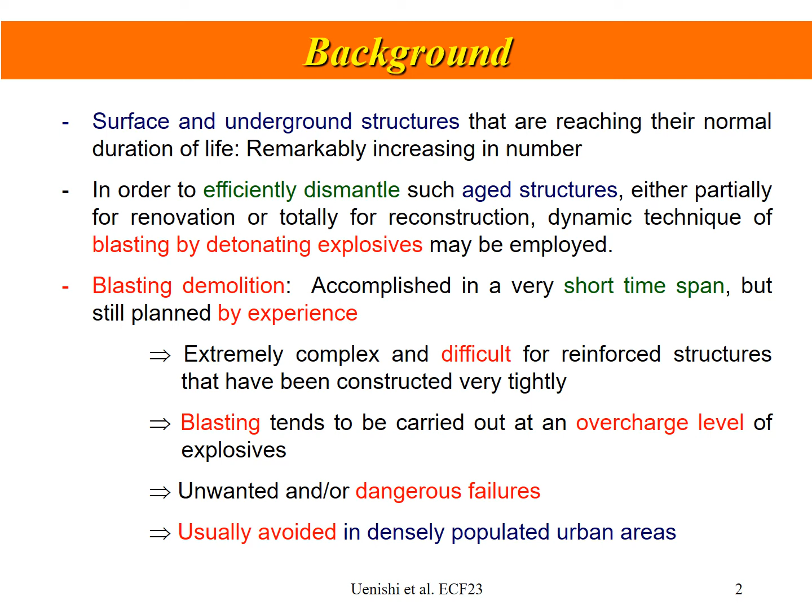Therefore, in place of explosives, by using safer and more controllable electric energy, and based on the theory of wave and fracture dynamics, we have been investigating a more reliable technique for precisely controlled dynamic disintegration of structures with and without reinforcements. So far, by applying electric discharge impulses, EDI, we have successfully disintegrated rectangular and cylindrical concrete specimens as desired.

We have found that specific combinations of blast holes, empty dummy holes, as well as free surfaces and pre-existing planes of weakness can really govern the dynamic behavior of the waves and the main crack, and thus the disintegration pattern in given structures.

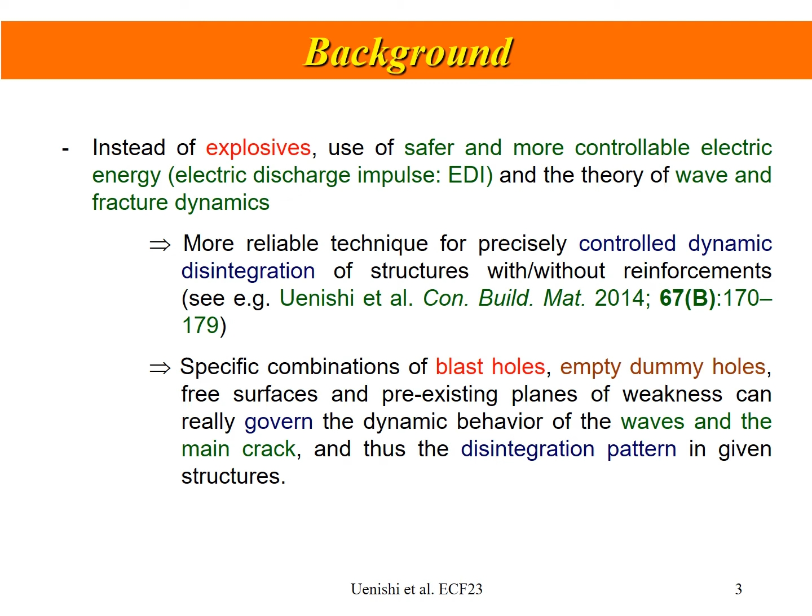Here, among others, we are going to talk about the following 4 selected examples of dynamic fracture due to EDI-induced waves. First, fundamental fracture development in a concrete column will be introduced. Then the effects of empty dummy holes, slits, and structural inhomogeneities on dynamic fracture will be briefly mentioned.

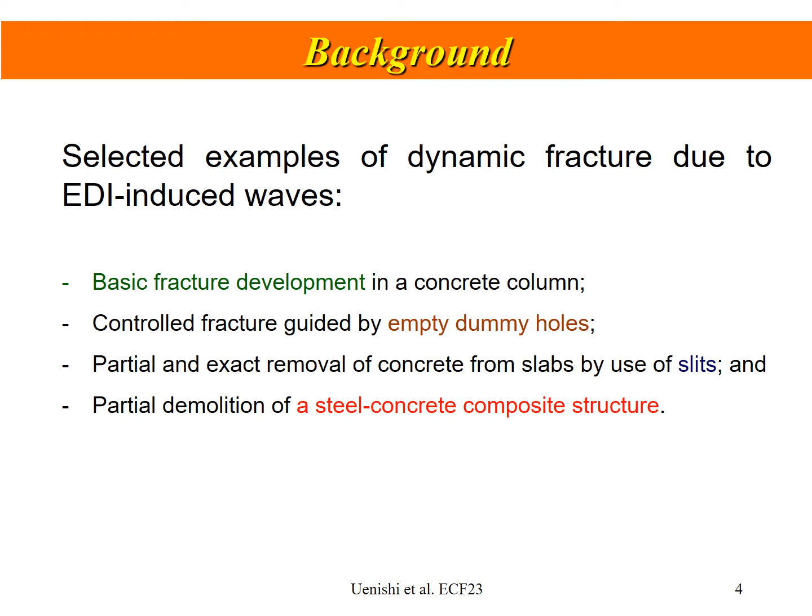Let us start with our electric fracturing system, EDICS, developed by Nichizo Tech or Hitachi Zosen Corporation. In EDICS, a cartridge containing self-reactive liquid is prepared, and the electric energy stored in a capacitor is discharged in the self-reactive liquid within several hundreds of microseconds through an electronic switch. Then high pressure is generated due to the rapid evaporation of the liquid.

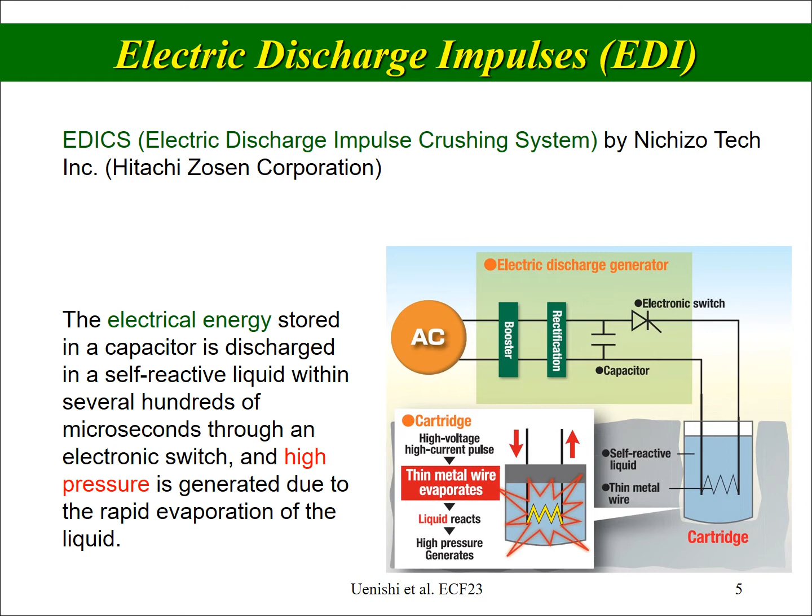In the following field experiments, these cartridges are placed in blast holes, covered by stemming material, and connected to the control unit of EDICS.

Here is the setup of our very basic experiment. We have prepared a cylindrical specimen made of concrete without reinforcing steel bars. The specimen has one blast hole at the center along the vertical axis, with the cartridge located at the very center of the specimen.

The model is symmetric with respect to the blast source or cartridge, except for the stemming section. In the field, the specimen is placed and subjected to EDI in a pit where the dynamic fracture process due to the action of EDI is recorded by a normal home video camera and by a high-speed camera at a frame rate of at least 50,000 frames per second.

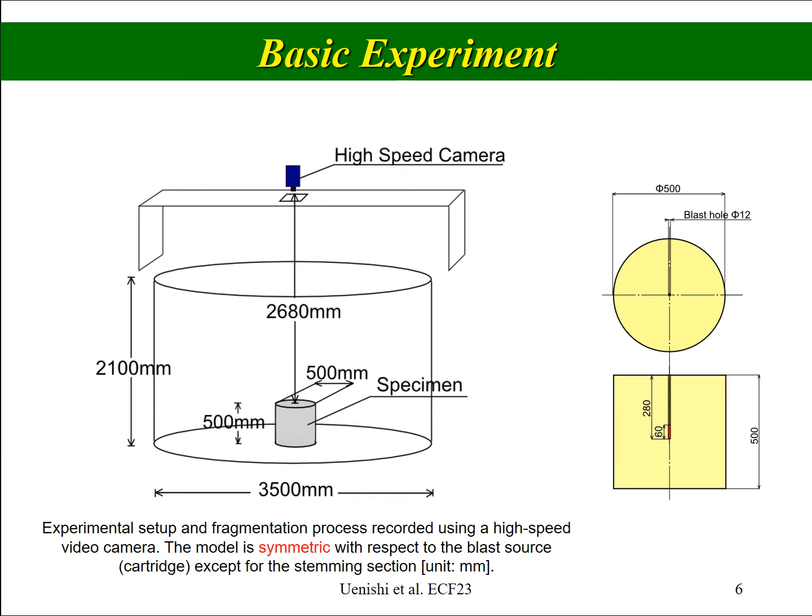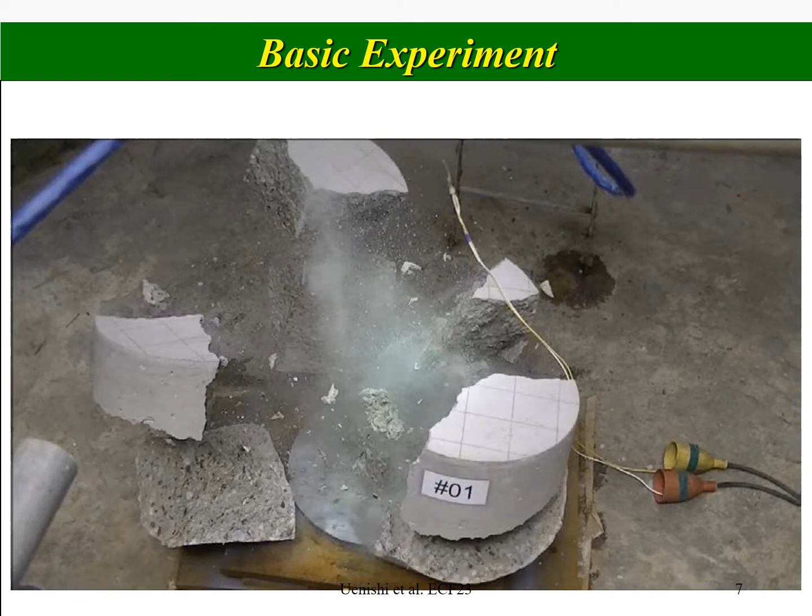According to the photographs, the cracks on the top surface seem to have run unidirectionally from the central blast hole to the edge, but in reality, as we see on the next slides, the cracks are formed by the combination of the outbound fracture propagating from the center and the inbound one moving from the edge to the center.

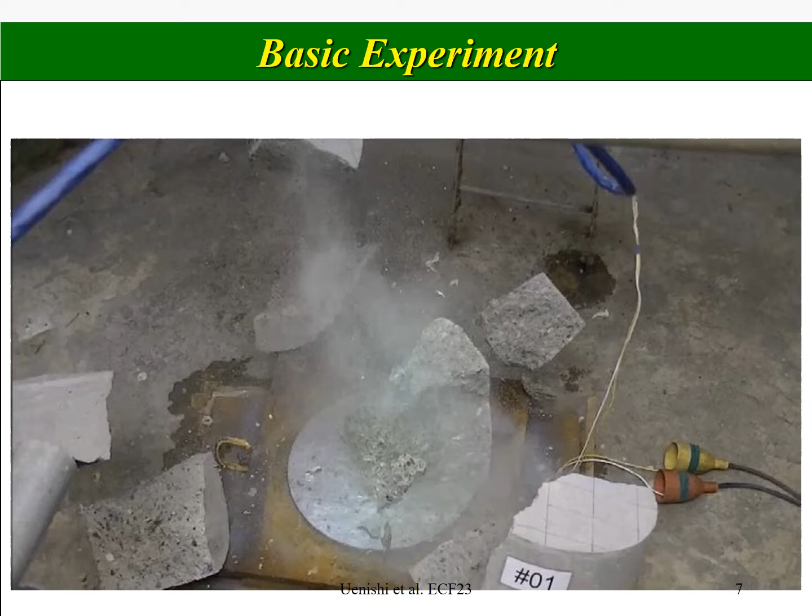Indeed, detailed observations by the high-speed camera reveal that on the top surface, a crack extending outbound from the blast hole located at the center, as well as that propagating inbound from the edge to the center, may be identified.

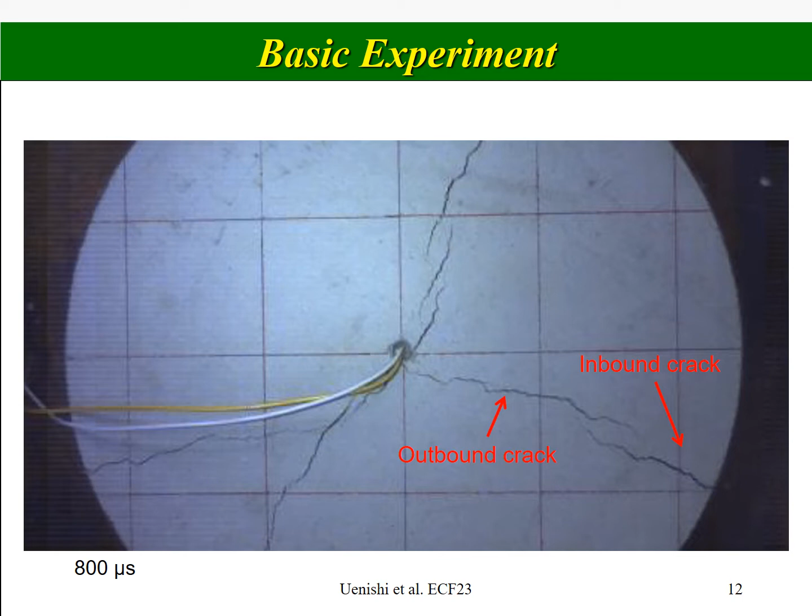The outbound and inbound cracks may extend, and may or may not merge, at a later stage. After the crack development, we see the crack openings are widened by some gas pressurization.

Thus, like in conventional blasting using explosives, we may expect also in the case of EDI crushing that cracks from end to the center develop first by the direct and reflected EDI-induced blast waves, and then gas pressurization takes place.

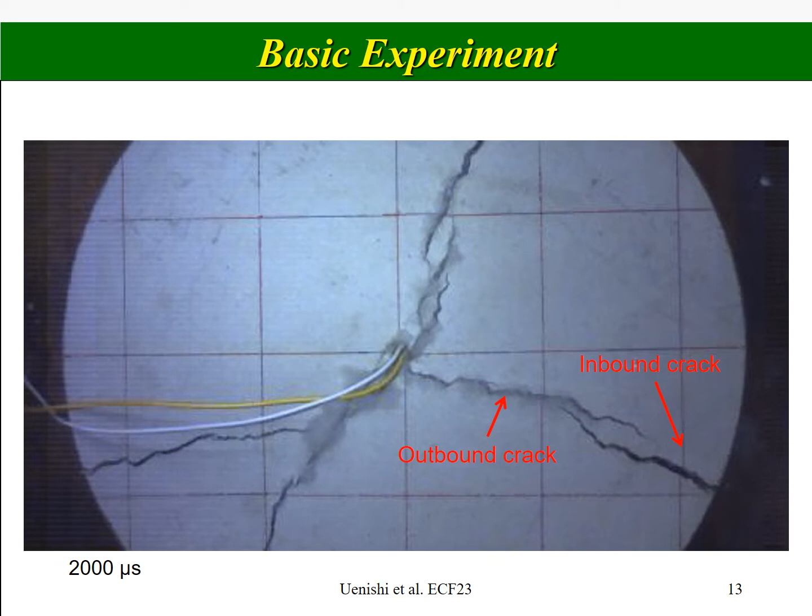EDI is applied to each of the 3 blast holes simultaneously. We expect that due to the superposition of the reflected waves from these dummy and blast holes, a main tensile crack extending rather straight and connecting only the blast holes will develop, at least near the center of the specimen.

The unusual point here is that dummy holes are not placed on the expected main crack path or the fracture plane, and they are set rather to direct the main crack to connect the blast holes only.

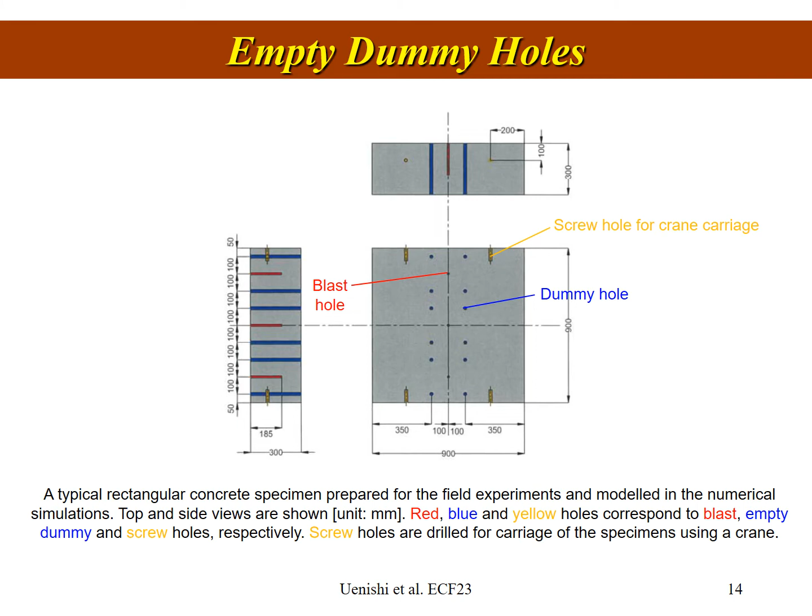Again, it seems that the dynamic fracture network induced by EDI develops first upon wave propagation in the specimen, and then gas pressurization widens crack opening displacements and the stemming material is ejected, like noted in conventional blasting by explosives.

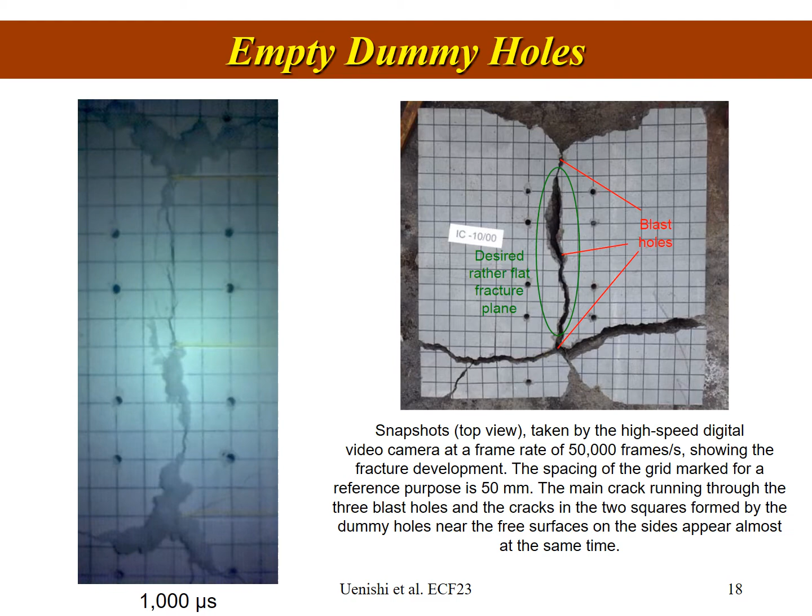The above experimental observation of the unusual role of empty dummy holes can be supported by our 3-dimensional finite difference simulator running on a PC.

Numerical details are omitted here, but we assume homogeneous, isotropic, and linear elastic concrete material, and the values related to material properties and EDI-induced time-dependent pressure are inferred from the experimental observations.

Although different physical quantities may be chosen, for simplicity, the stemming material covering the cartridge and filling every blast hole is presumed to have the same material properties as concrete.

Also, although technically simply implemented, no specific fracture criterion is incorporated at this moment, because, first of all, we must know how waves generated by the new technique, application of EDI, propagate and interact with given inhomogeneities.

This is possibly due to the existence of waves reflected from the nearby holes and propagated towards the middle blast hole, and a tensile crack plane connecting the 3 blast holes will emerge rather smoothly at a relatively earlier stage, as expected from the experimental results.

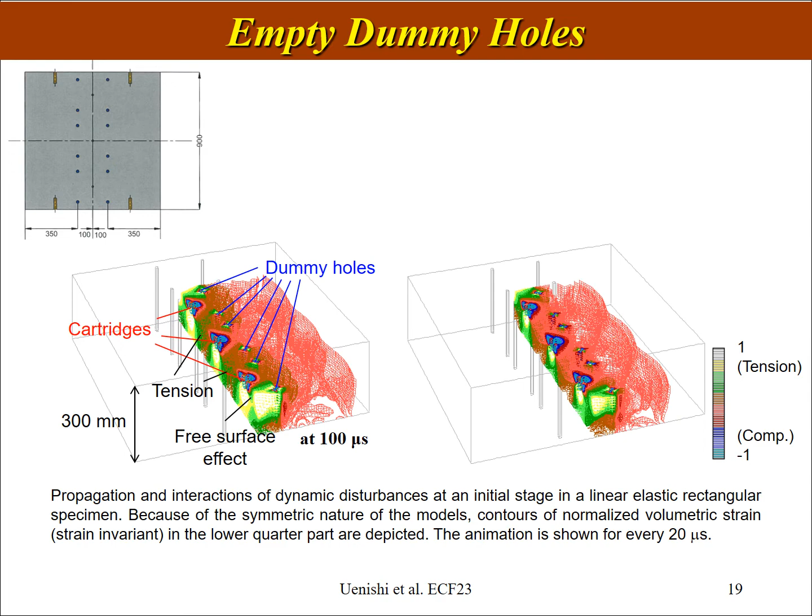The third example is the dynamic disintegration of sections in large concrete slabs without reinforcing steel bars. By setting in advance vertical slits inside large, unreinforced concrete slabs, we have tried to control wave interaction and dynamic structural disintegration.

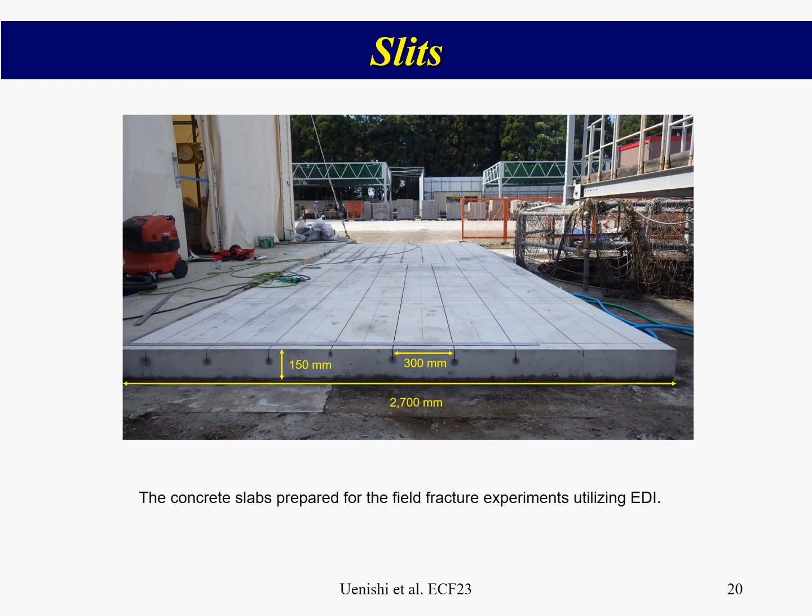As seen here, the concrete slabs are split into rectangular sections with slits of depth 70 mm. Each section has 6 blast holes along the center line that are simultaneously pressurized with EDI.

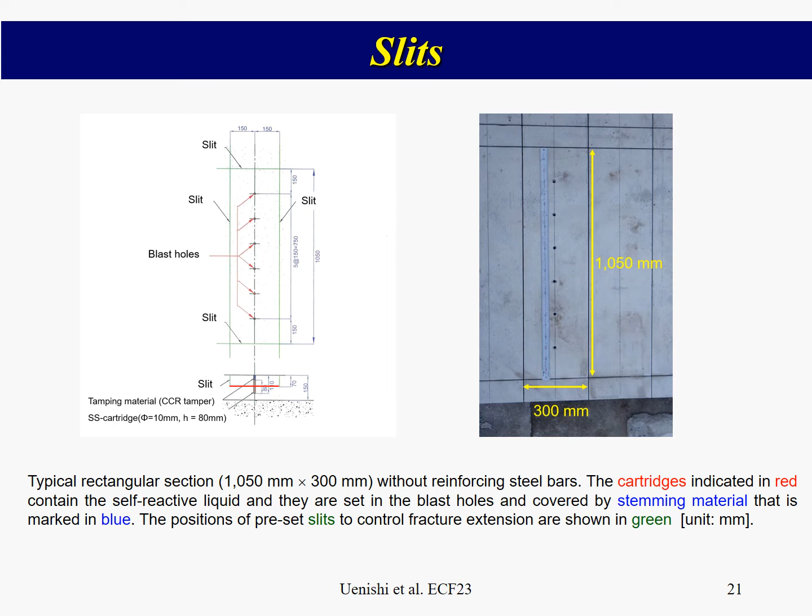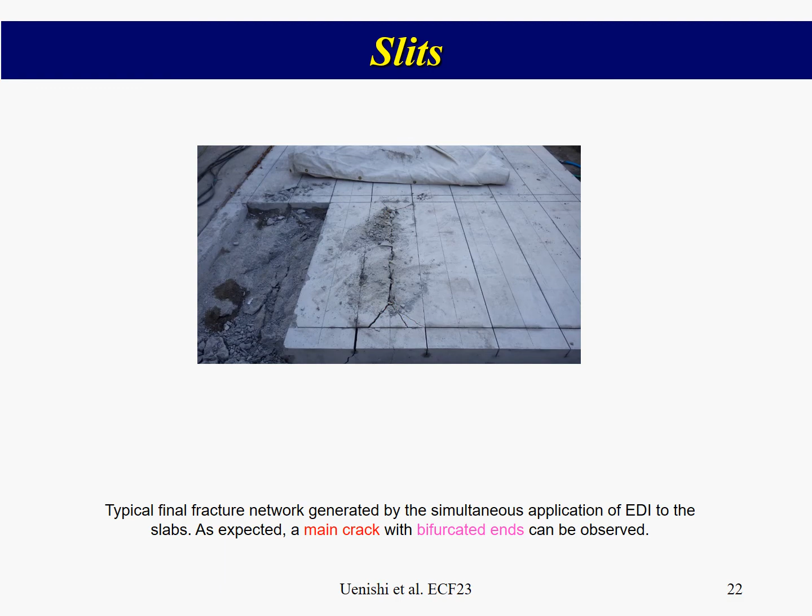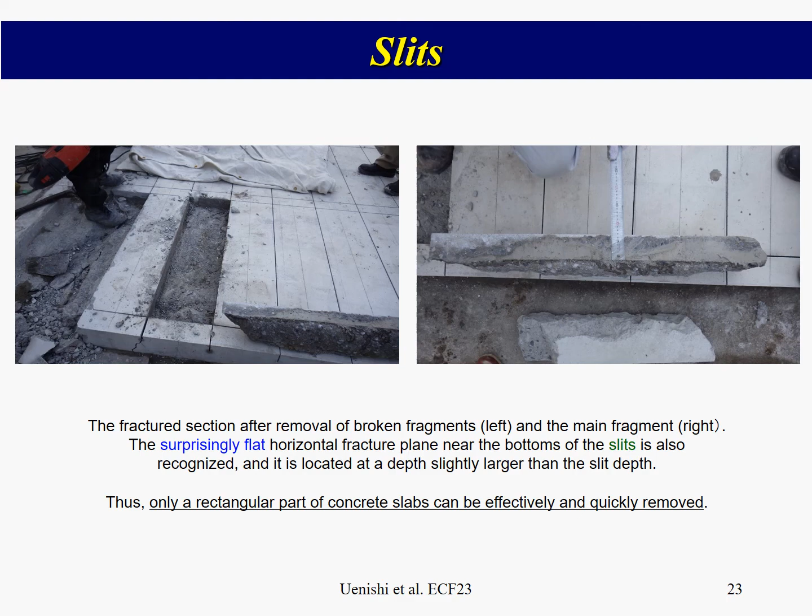Together with the horizontal fracture plane connecting the bottoms of the slits, only a rectangular part can be effectively removed from concrete slabs. The relative positions of the blast holes to the top free surface and preset slits, compared with the wavelengths of EDI-induced waves, may play an important role in generating the final fracture pattern.

Again, our fully three-dimensional finite difference numerical code for a PC may well explain the real field observations qualitatively. The waves generated around the cartridges are initially compressive, and then tensile zones due to reflection at the top free surface and the slits emerge, which may induce cracks.

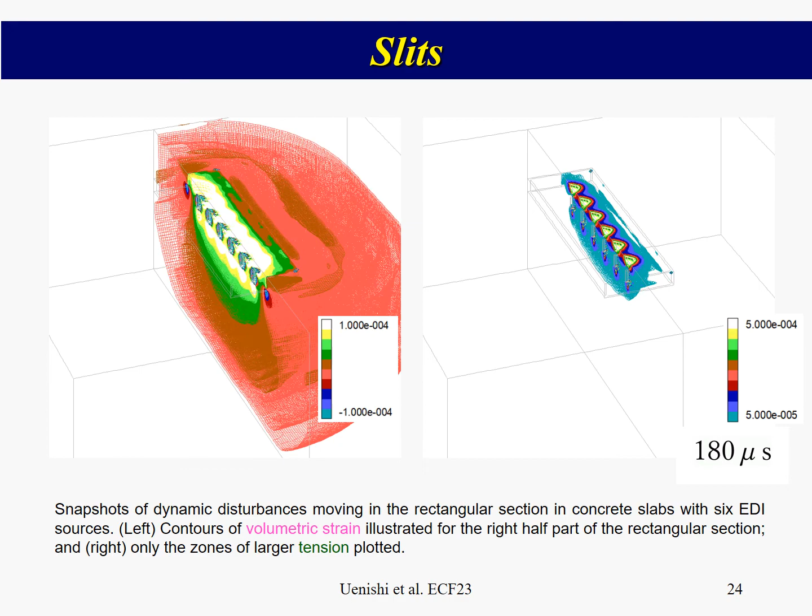Plotting only the zones of larger tension, shown on the right, clearly indicates that tensile zones which are likely to be more easily fractured can be identified only inside the rectangular section bordered by the top horizontal free surface, vertical slits, and the rather flat horizontal plane near the bottoms of the slits.

The final example of the usage of EDI-induced waves for controlled dynamic fracture is related to a steel concrete composite structure that consists of a reinforced concrete slab on top of a steel girder and stud dowels or shear connectors.

Here, we have 8 blast holes and 9 stud dowels inside the model. The objective is to crush and remove only concrete material by EDI-induced waves while other parts of structures like stud dowels and steel girders remain undeformed for later renovation work, even in densely populated urban areas.

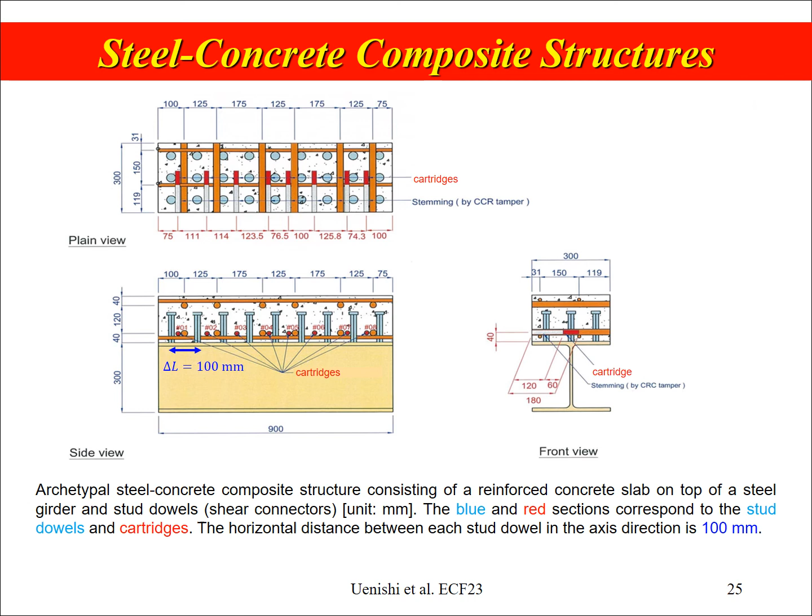The experimental result shows that concrete material can indeed be removed without impact on the stud dowels and steel girder. Here, a horizontal fracture plane connecting the heads of the stud dowels and another horizontal fracture plane linking the cartridges are generated.

The concrete material above the heads of the stud dowels can be lifted and removed as a rectangular block, and in other parts of the reinforced concrete slab, due to the action of EDI, the concrete is fragmented into smaller pieces, most of which can be taken away by hand or with a crowbar.

Three-dimensional finite difference simulations can show that the plane virtually formed by the heads of stud dowels are expected to act as an interface that prevents the transmission of tensile waves, and thus generate the observed unique fracture. However, if the distance between the stud dowels is increased, the role as a virtual interface can be lost.